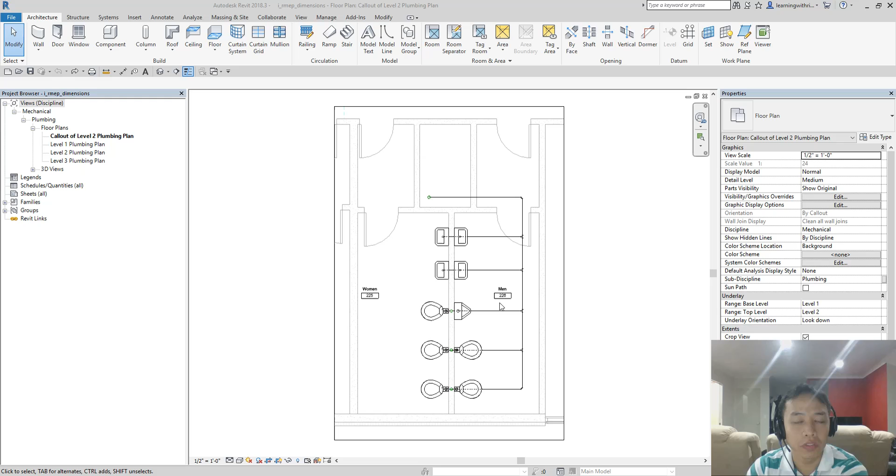Let's say we are going to put some dimensions in this model here. I'm going to show you how to put dimensions. As you can see, this model is familiar.

This is actually the model that I used last time when I did the sanitary and plumbing exercise. Now this time I'm going to put some dimensions and we're going to explore some options.

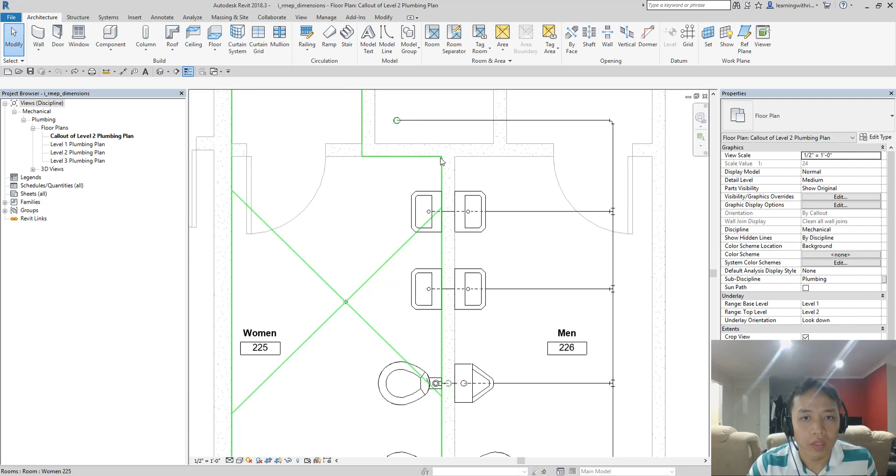So what I'm going to do is select this plumbing fixture here, this one. And then the first thing you will notice is there's a dimension here.

So this dimension is actually a temporary dimension. Temporary dimension means if you click outside, it will disappear, right? Or if you escape.

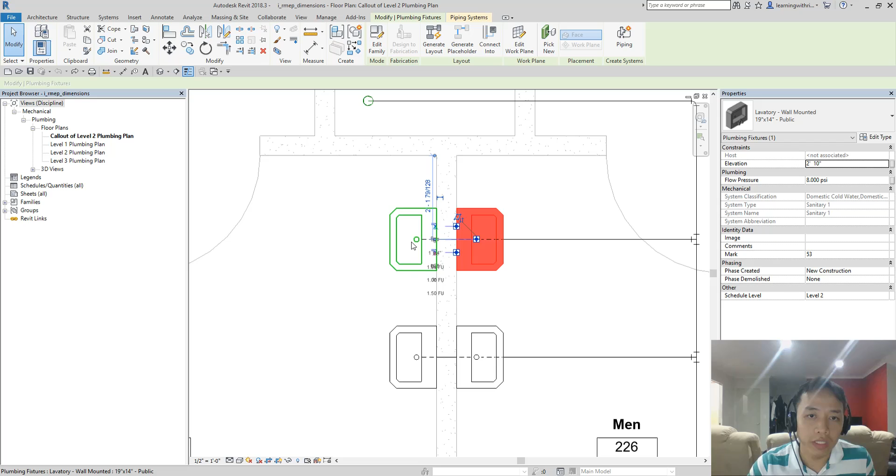Now what I'm going to do is select this and then change the dimension of this. Let's say I want this 2 feet. You can change the temporary dimension by selecting the element, and then you can change the temporary dimension.

So let's say you want 2 feet, you just need to type 2. You don't need to specify the symbol for feet because if you check your units command, the unit is already in feet.

So every time you key in a number or a dimension, Revit will automatically read it as feet. That's why if you want to key in 100 millimeters, you need to key in 100 mm.

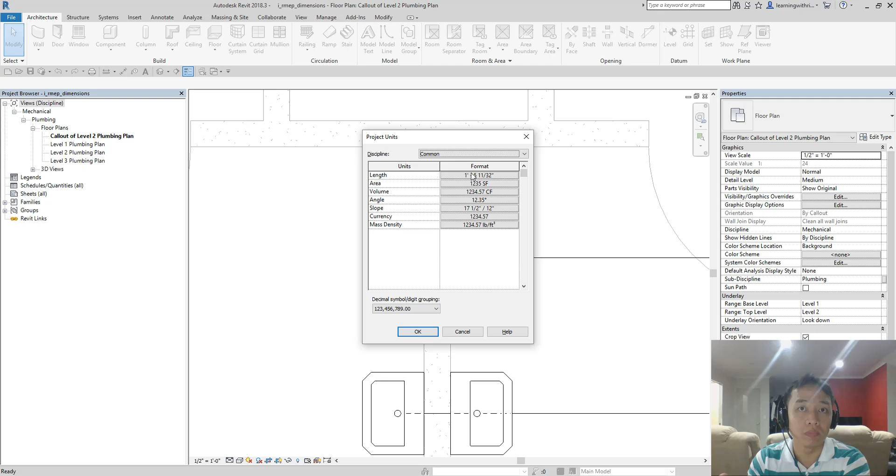But if you just want to type 2 feet, you can just type 2, because the default unit is already in feet and inches.

So I'm going to select the dimension, select the plumbing fixture, and then select the temporary dimension here, and just type 2 for 2 feet.

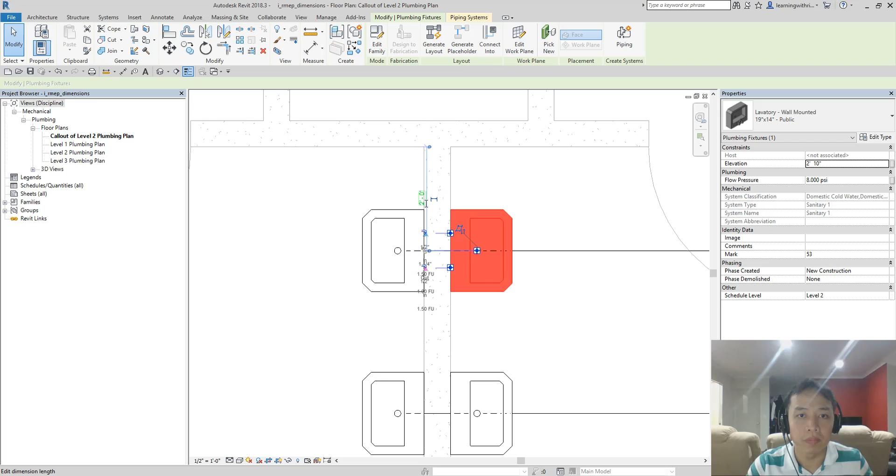So 2, and then you just need to press enter. And as you can see, it already changed.

Now the next thing we are going to do is, since that is a temporary dimension, in case you want to make that temporary dimension permanent, you can click the fixture again and then click this little icon here.

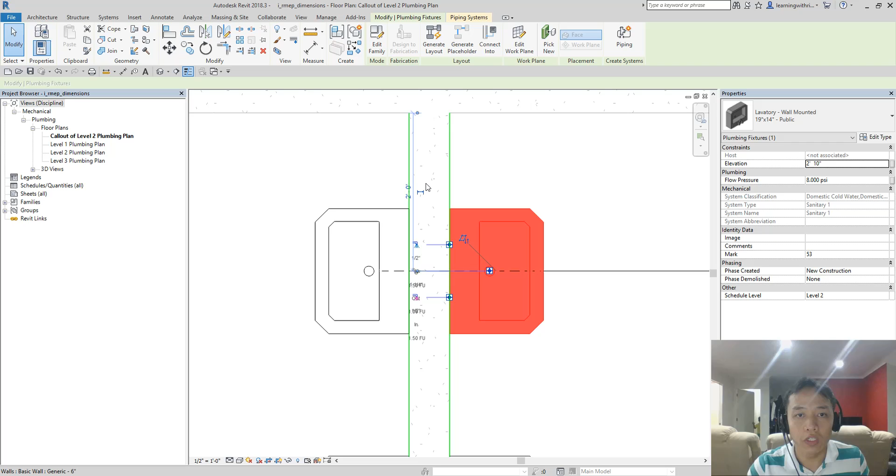As you can see, it says make this temporary dimension permanent. So you can click this icon and then just escape. Then you'll notice it's now permanent.

Then you can now select that dimension and drag it to change the location or rearrange it. Now that this is already a permanent dimension, you actually have an option here if you want to padlock it.

The distance from this wall to this plumbing fixture will become fixed if you lock it. But anyway, we are going to do that later on.

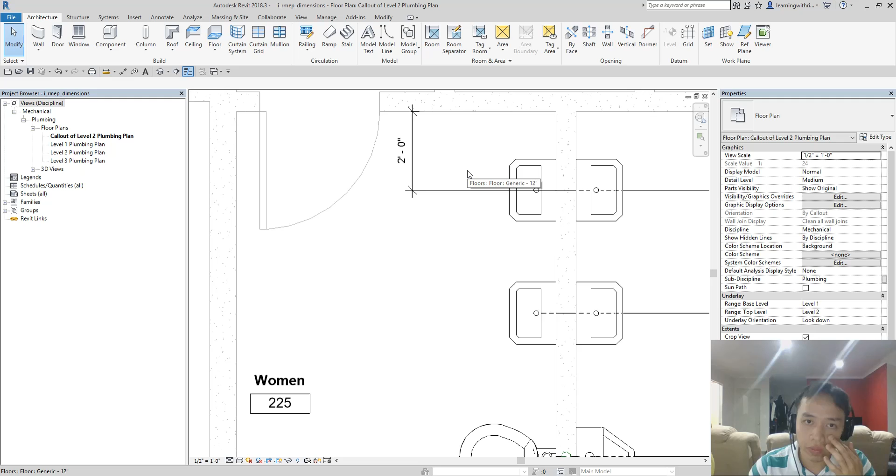So what we are going to do next is, after we place this dimension, we'll be placing dimensions also to the remaining plumbing fixtures here. To do that, you actually have an option here.

You can click this tool here, align dimension, or you can go to Annotate and use these tools to put dimension. But I'm going to show you a shortcut for that.

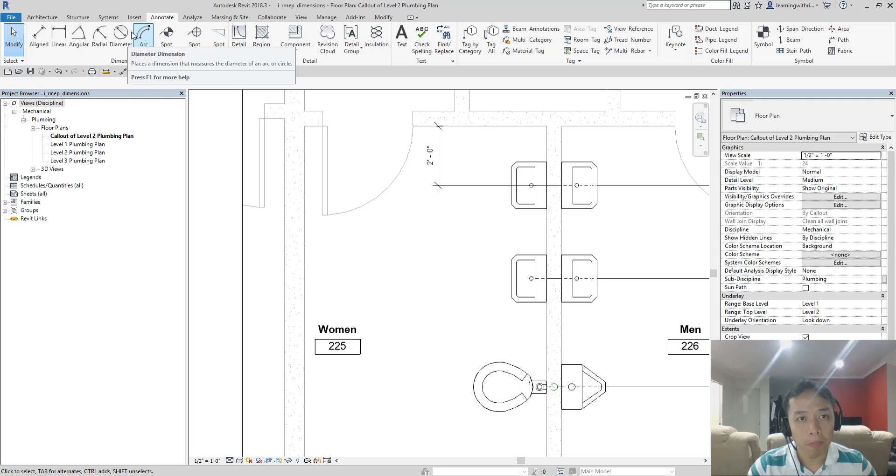So if you want to place a dimension, what you can do is select the dimension here, and then there's an option here, witness line, edit witness lines.

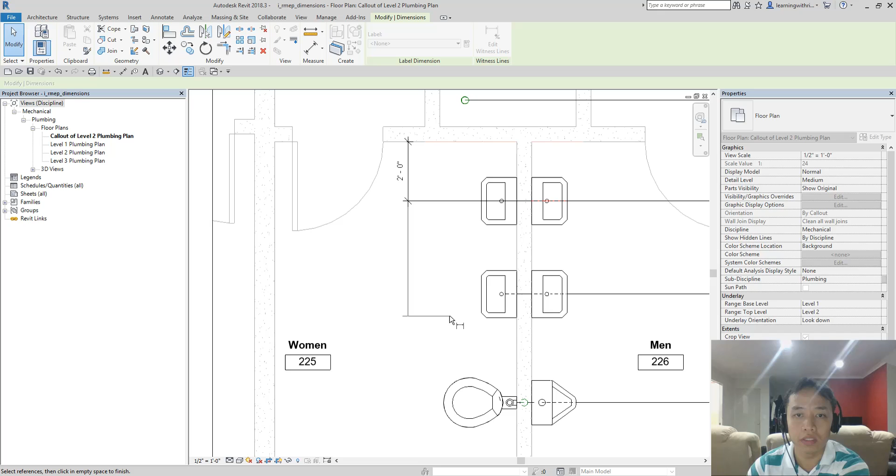You can select that, just click, and as you can see, it's now continuous. So I can now click somewhere here to place the dimension.

I place one here, place one here, place one here, and I'm going to place one here.

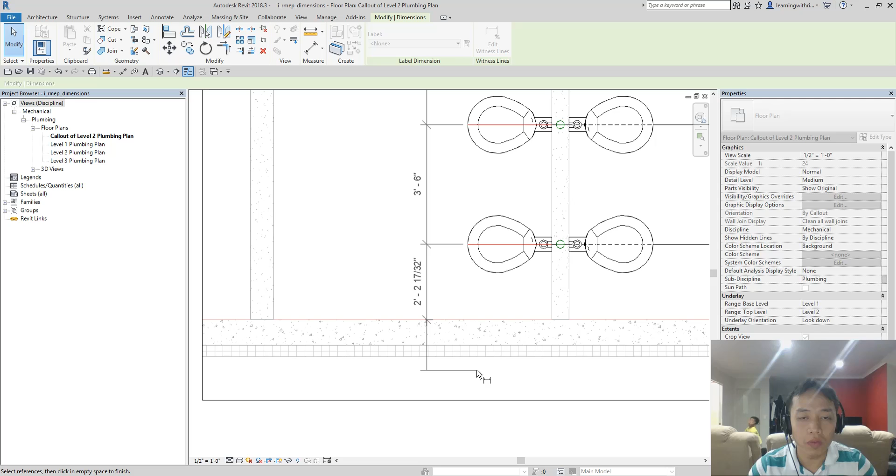In case you want to terminate your witness line or the dimension, all you have to do is click outside. You can click to this side or to that side, it's up to you.

Then the next thing we are going to do is try to lock it. So I'm going to lock the dimension. I'm going to click this dimension, and according to my guide here, I need to lock this portion here.

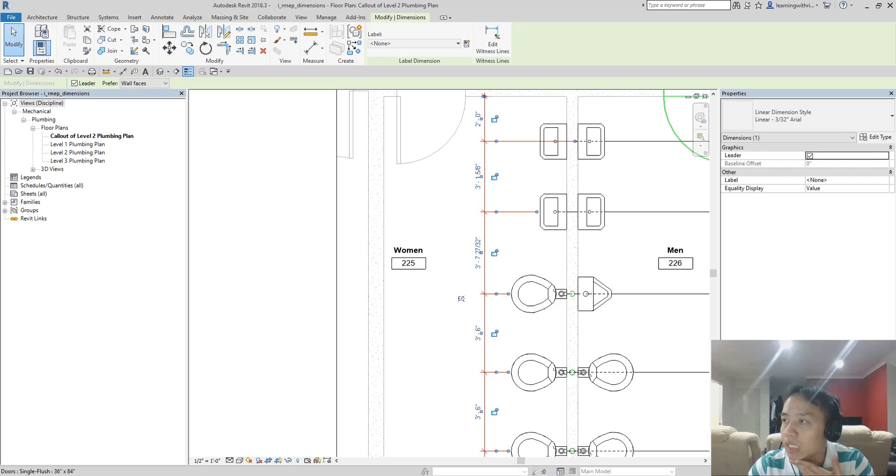So I'm going to lock this, and then change the dimension. Let's say, for example, I've changed my mind and do not want this dimension to be the distance from the center line of this plumbing fixture to this wall. So I want to change this dimension.

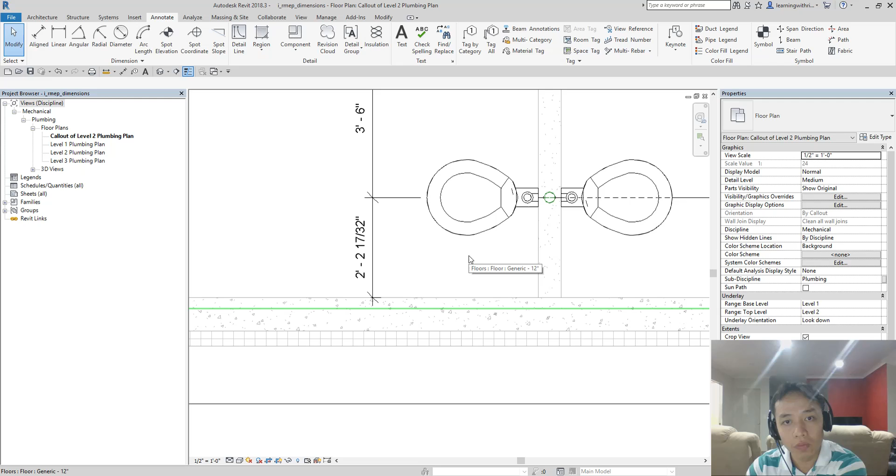So you cannot just simply double click this and then change the value. If you double click that, it will just change the dimension text.

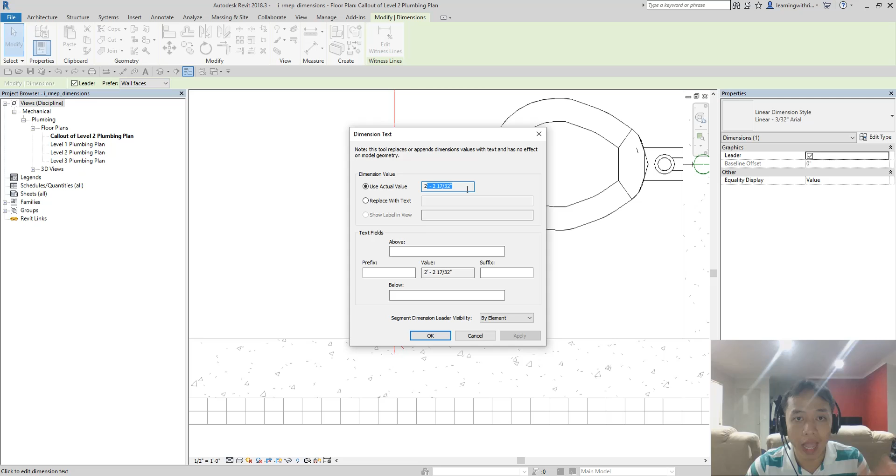But it will not actually change the actual measurement. So you can just override it if you want, but the actual dimension will not be changed.

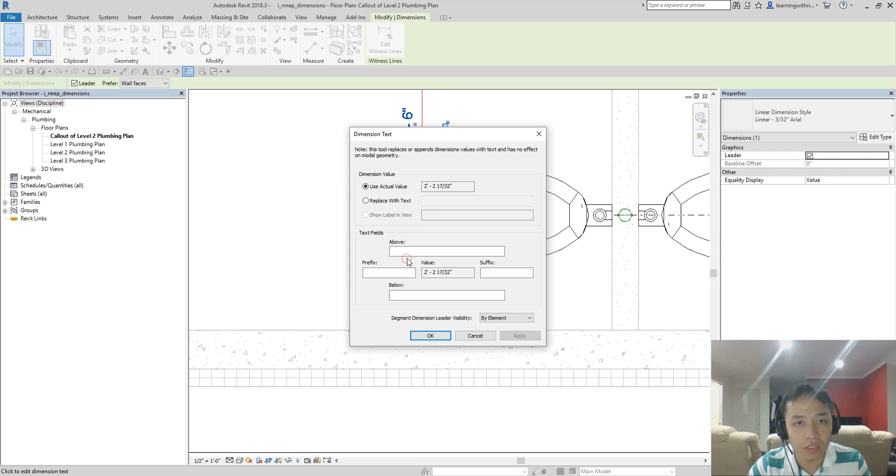So instead of double clicking using the dimension text, what you need to do is select the plumbing fixture first. You click the plumbing fixture, and you'll notice it becomes a temporary dimension. Then you can click this dimension and change the value.

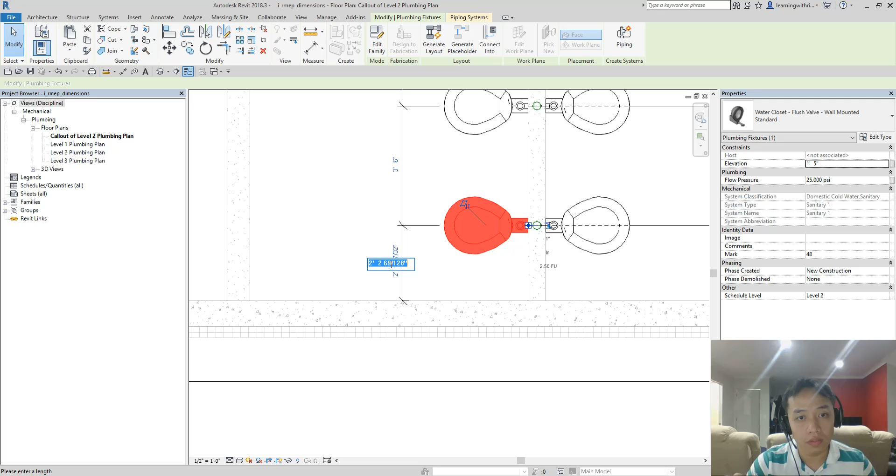The value we'll use here is 1 foot and 6 inches, so you can type 1 space 6, and Revit will read it as 1 foot 6 inches. Just press enter. There you go. Let's remove the constraint first, then click outside. As you can see, it's now changed.

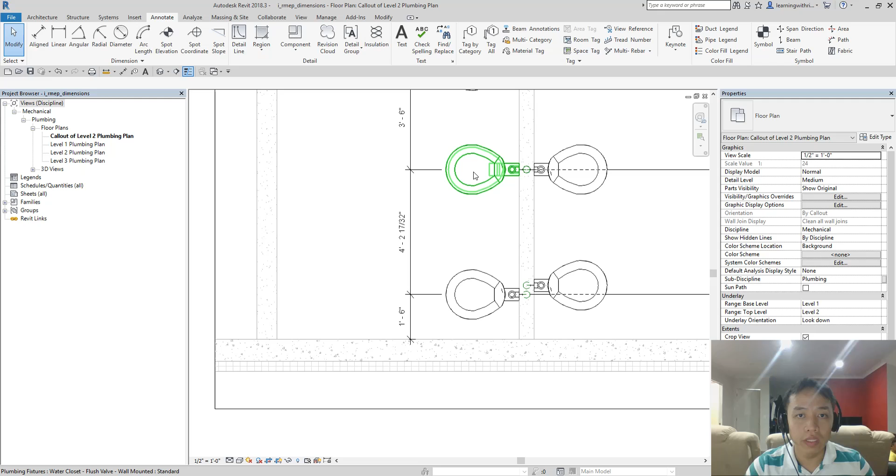Let's say I also want to change the distance of this plumbing fixture to this plumbing fixture. Instead of selecting this one, you need to select this plumbing fixture here, click it, and change the temporary dimension. The value I'm going to use is 5 feet, so I'll type 5, enter, and remove the constraint.

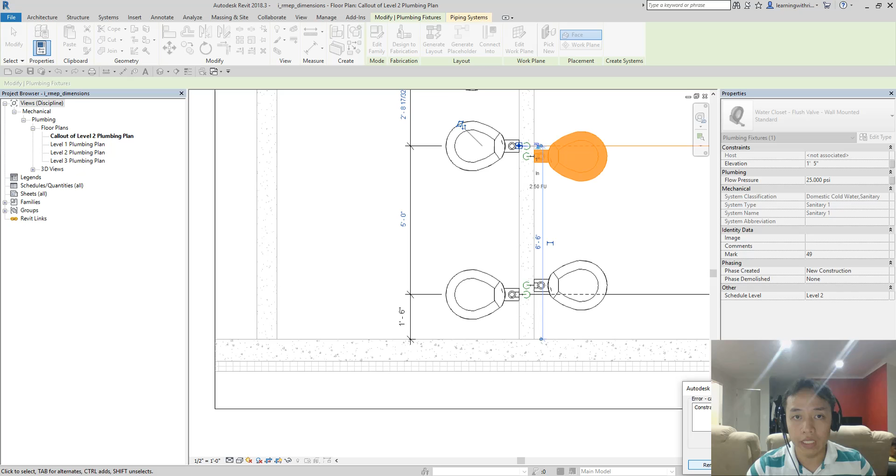Then I'm just going to align this plumbing fixture. So I go to Modify, Align, and align here, here, here, and here.

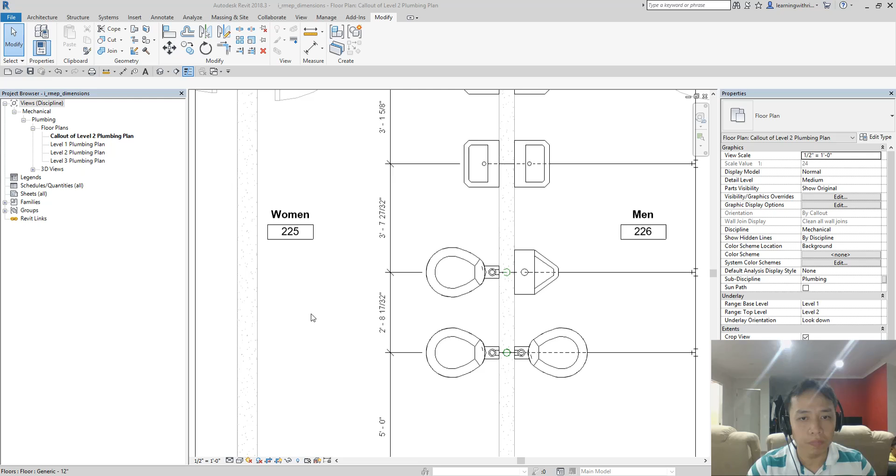There you go. Next, I am going to change the dimension of this one to this one, and the distance is 3 feet. So I'll select this and change it to 3 feet, just type 3.

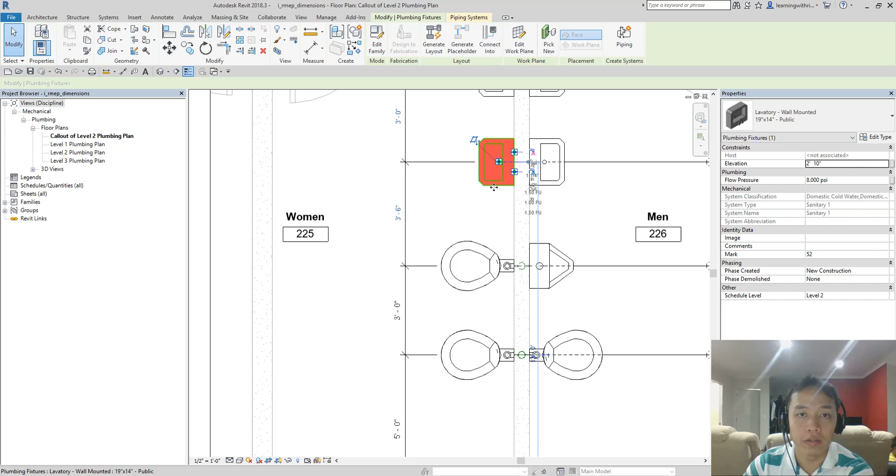Then I'm going to select this one and click the temporary dimension. So it's 3 feet and 6 inches. Enter. There you go.

Now that I have changed the dimensions of my plumbing fixtures to each other, let's try to explore the lock option here. There's a lock here, so let's say I'm going to lock this one, then lock this one, lock this, and lock this.

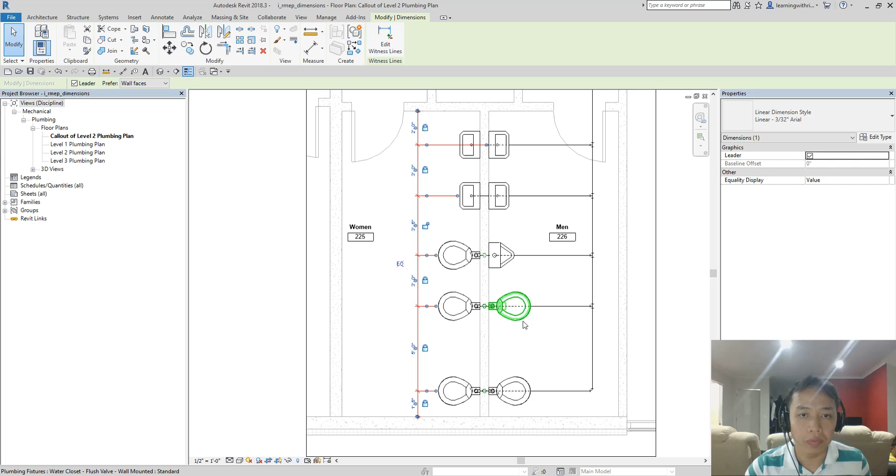So what will happen is the distance of this plumbing fixture to this wall will be fixed to 2 feet. Same with this dimension here, the 3 feet, this one will become fixed. This one can be changeable, because it's not locked.

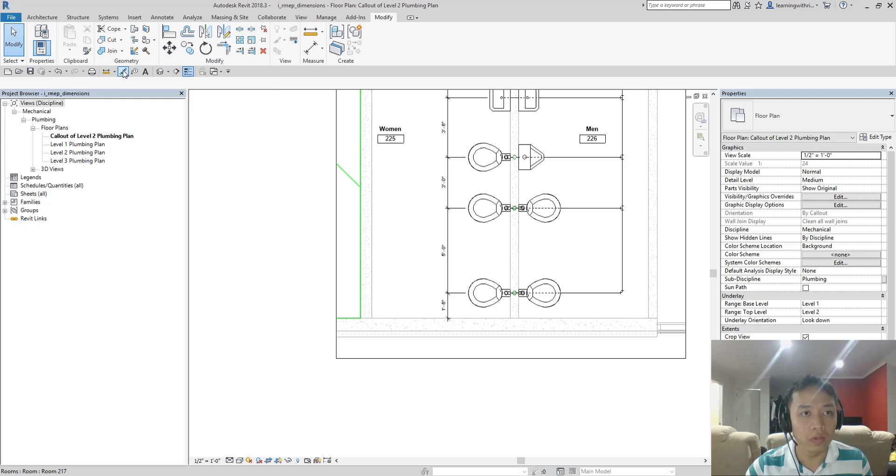By the way, let us put some dimensions. I'm going to put a dimension from here to here, using aligned dimension. Just click that, then click from here, 1, 2, and I just click here.

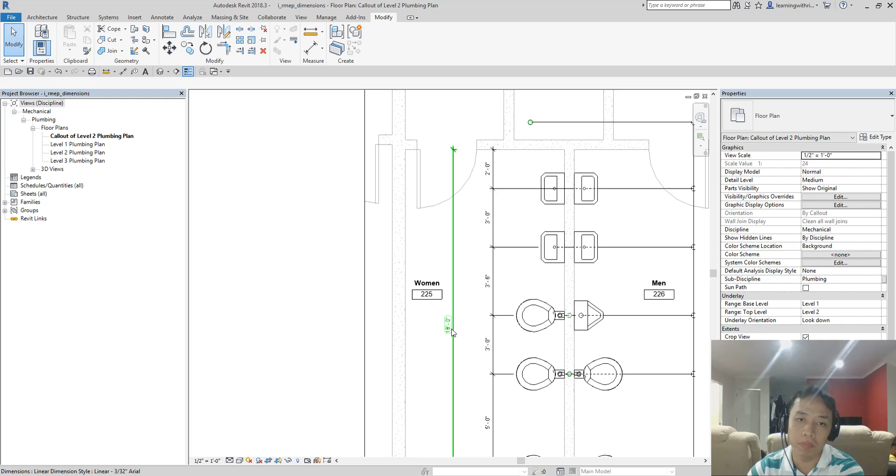There you go. Now the next thing I'm going to do is change the value of this one. Let's say I want to make this 19 feet. For me to do that, I need to select the element attached to this dimension.

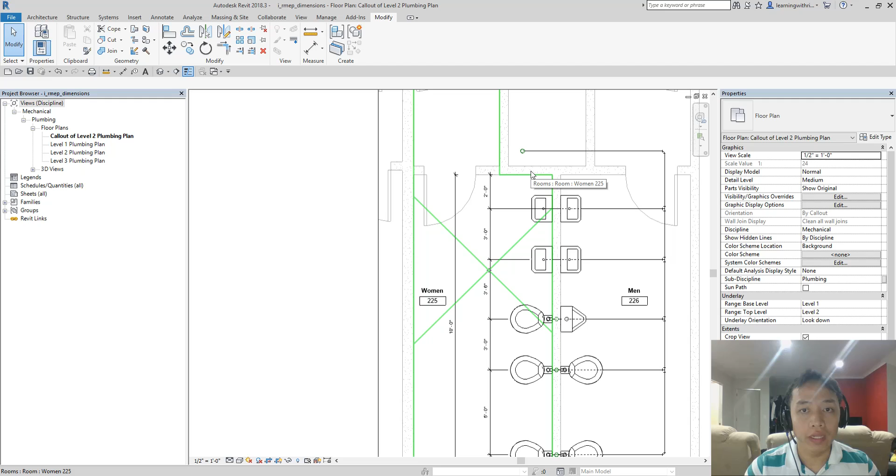Since I want to select the wall here, you need to press Tab to cycle the selection and eventually select the wall. You hover your pointer and press Tab, and as you can see, it's now selecting the wall that we need, because this dimension is attached to that wall.

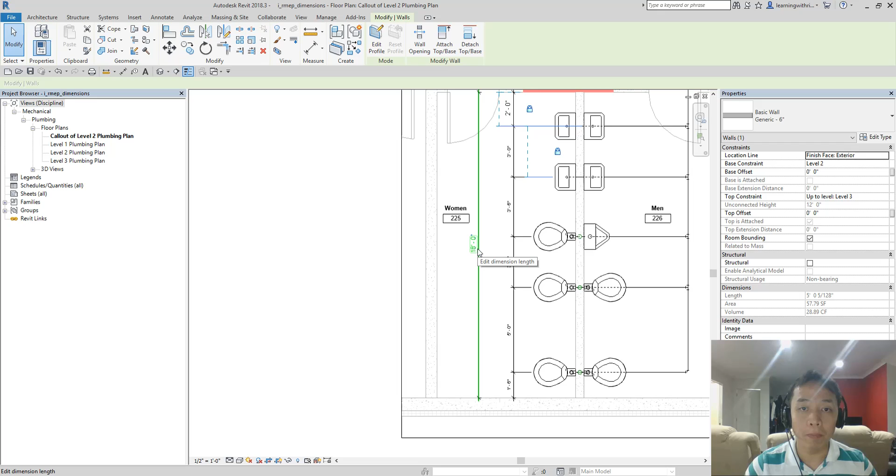So I hover my pointer, press Tab, and once it highlights, you just click that. Then you'll notice your permanent dimension becomes a temporary dimension again, enabling you to change it. You click that, and let's say you want 19 feet, type 19, and press enter.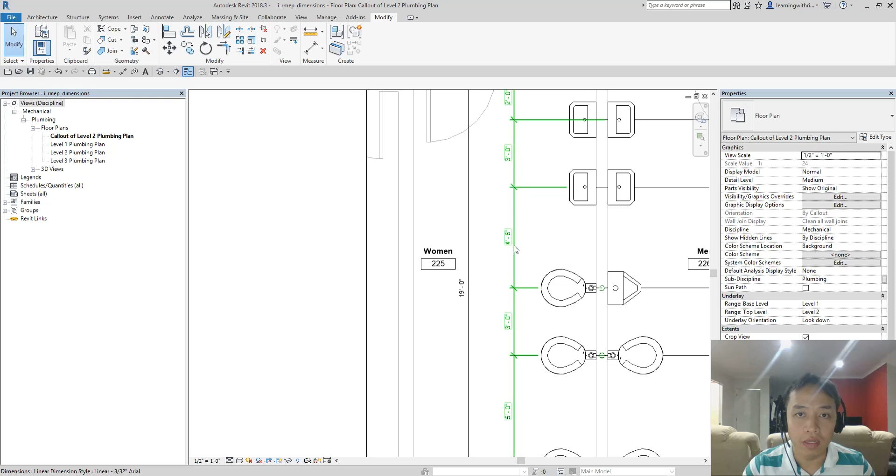There you go. I'm going to press escape. Only this dimension changed, because this one is unlocked, but the rest of the dimensions here all remain the same. So basically, that's how the lock tool in dimensioning works.

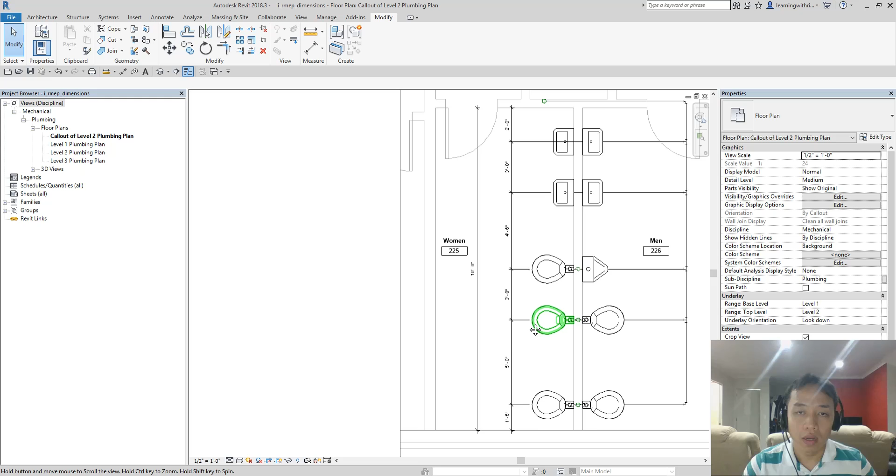The next thing you need to understand is that during the examination there's a question asking you to delete a dimension from a dimension string. So let's say you want to remove this, delete this one dimension — that's one of the exam questions.

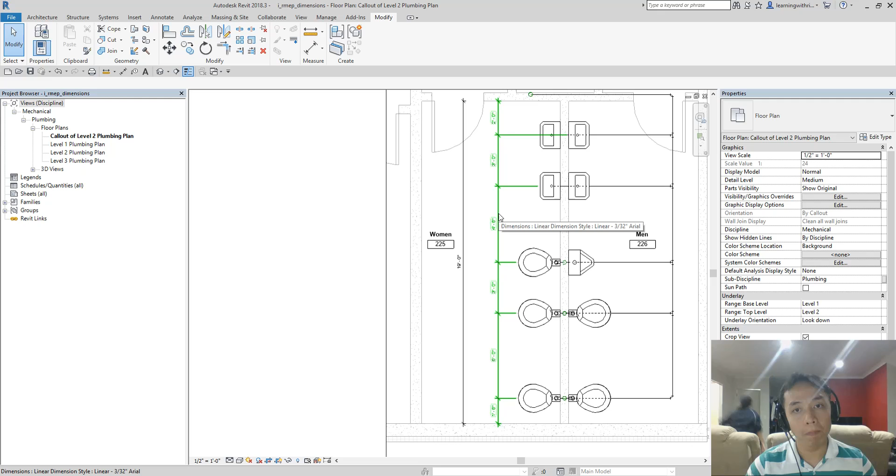To do that, you just need to hover your pointer over the dimension you want to delete, press your tab, and once it highlights, click that, and then you can delete. Easy as that.

So basically, that's how you do it. That's it for our exercise on dimensioning. The question on the examination is not that difficult — this is more difficult, but the exam question you can easily do.